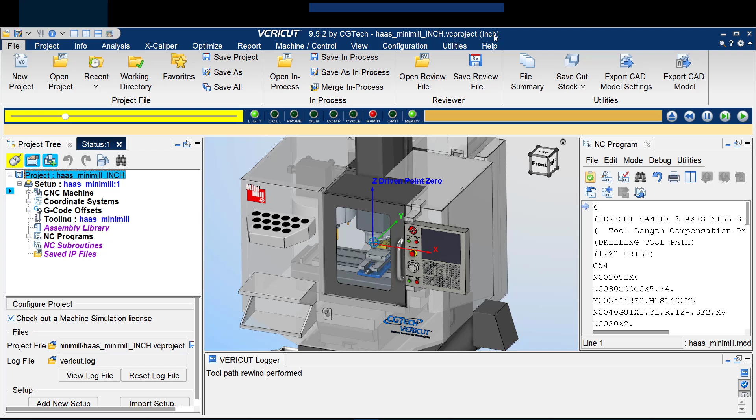For further confirmation, I'll open the file summary window. And that's here with the file tab, file summary icon. And that shows you all of the files within the Vericut project. So if I'm looking up here on the right side, I can see that the project files are inch, the control files are inch, and the machine files are inch.

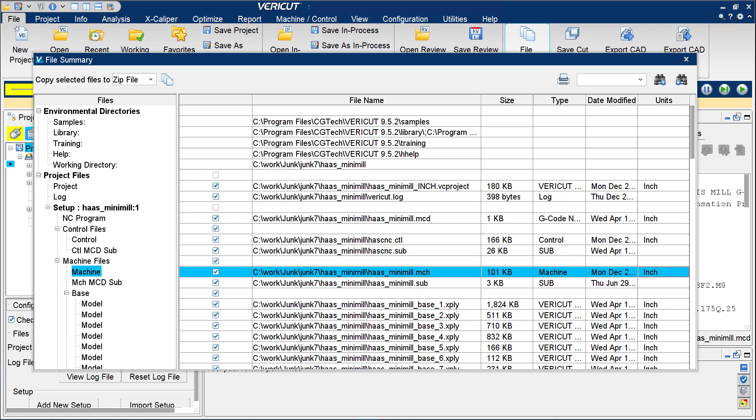The rest of the files in here are just the models that are being used. Some of them might be inch, some might be millimeters, but none of that is important at this point. The conversion is for the machine and the control file. Let me get rid of this.

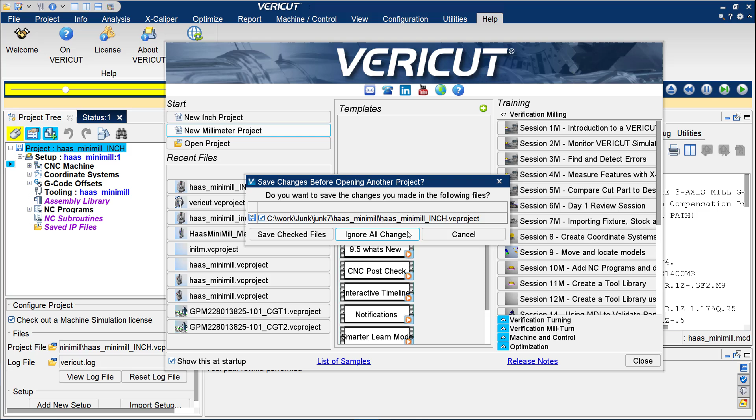To start this new millimeter project, I'm actually going to close up the inch project I have. And to do that, I'm going to go to Help, Welcome, and in the Welcome window, I'm going to choose New Millimeter Project. Ignore all changes as it closes the existing project. And now I have a project that has absolutely no machine or control in it. So I need to now add or import that next setup.

So by selecting Setup, right-click, import a setup, I'm going to go find that inch project that I had. By default, it went to my working directory. Select that, open, and import. Give it a second here. I'm going to close this window. Now let's take a look below.

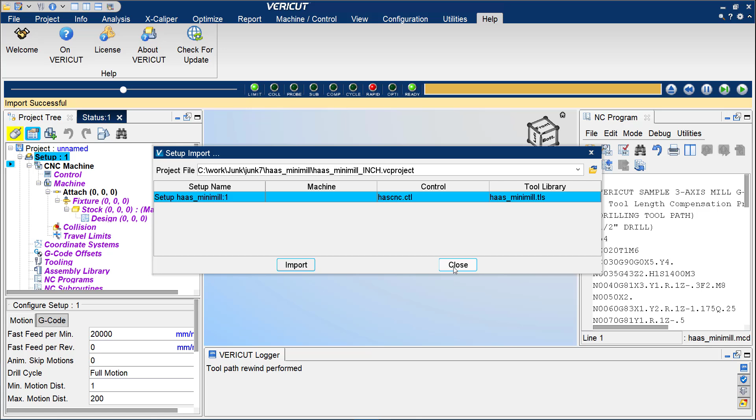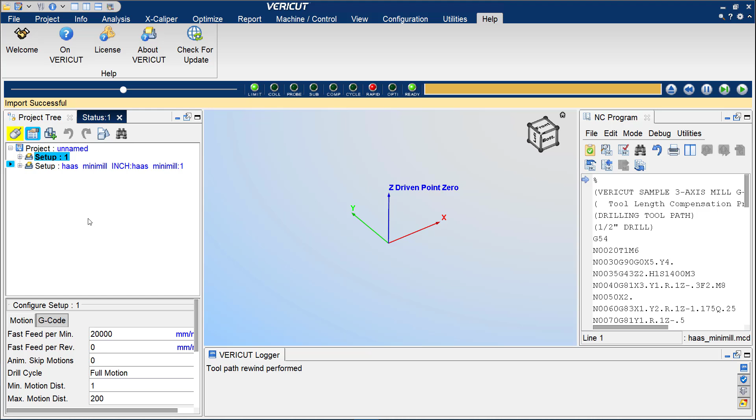I actually have two setups in this case now. The top one is the original, which has no machine and control, but it is a metric millimeter project. And there's the header showing you millimeter. So I'm going to delete setup 1 with a right click, delete. That leaves me only the second setup that I imported, which originally was inch and has now been almost completely converted over to metric.

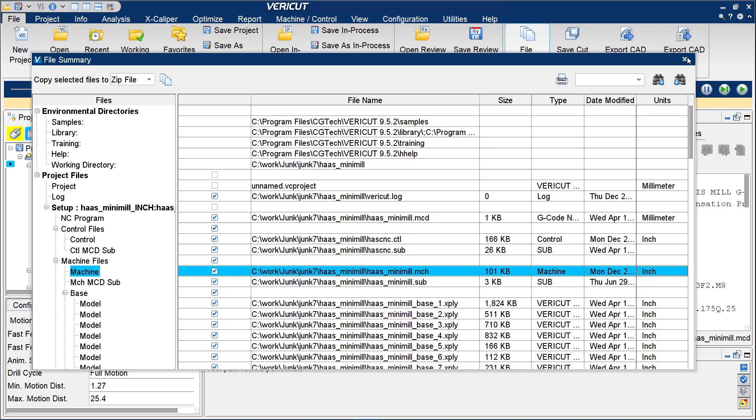So just to confirm that, let's open up File Summary once again, and you'll see that the project is now millimeters, but if you notice, the machine and control are still set to inch. Close this up. I'm going to right-click on the control in the project tree and do a Save As. And down in the bottom, I'm going to choose the millimeter option here. And save.

Yes. Do the same thing with machine. Right-click, Save As. Give it a new name if I wish. Millimeters. Save. Yes.

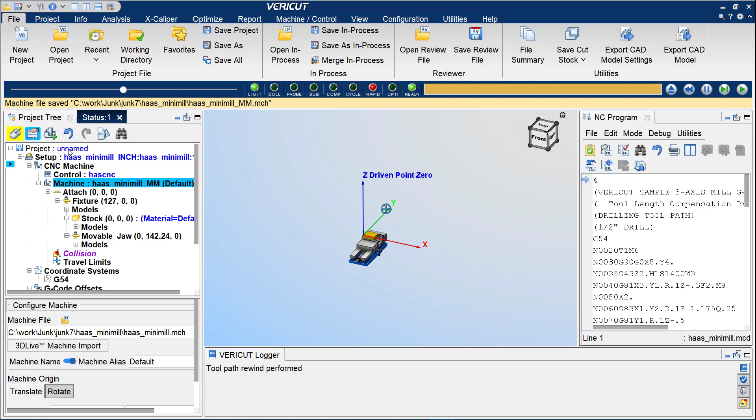I want to make sure I rename this project or save as the entire project. It's currently unnamed. Right-click on that, save as, find myself a nice working directory. I always like to use my work junk. And let's go to here and call this Haas Mini Mill millimeters. Save. If I do a reset, I'll see the new name apply there.

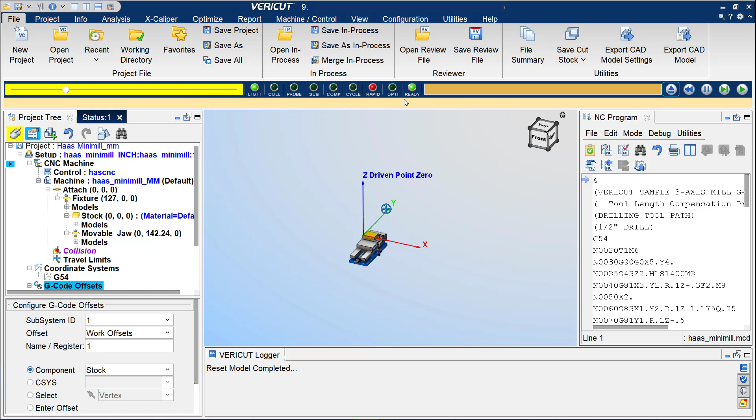I want to do a save all so it captures my new machine and control name. Do a reset once again. I find at this point it's best to close the Vericut session completely and open it back up. Now with the new file open back up, I can go back to File Summary, and now I've got project files and control and machine all set into millimeters.